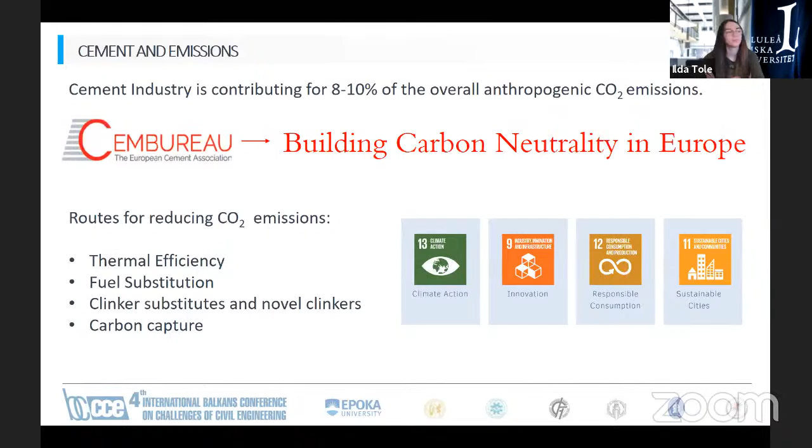In this study, we are utilizing two different materials, or two different sources: mainly clay as a low-grade supplementary cementitious material, and air-cooled blast furnace slag.

If we look at the overall presence of these supplementary cementitious materials, we can see that there are different sources, and some of them have a main challenge to be available as resources. For example, the main challenge is the location of these blast furnace slags, or the decarbonization of the power structure, which is reducing the amounts of fly ash materials.

On the other hand, there are a lot of sources that are commonly occurring and can be found everywhere, and are not yet utilized, such as clay in this case. We can see the high amount of unused residues here, around 600 million tons per year, for example, and the great amount of primary source supplementary cementitious materials which can be utilized.

Starting with clays, I start from the actual area where I'm living and studying. In Sweden, the presence of clay is not really so much, and it's mainly based in this south area. The main problem in this case is the instability of this material.

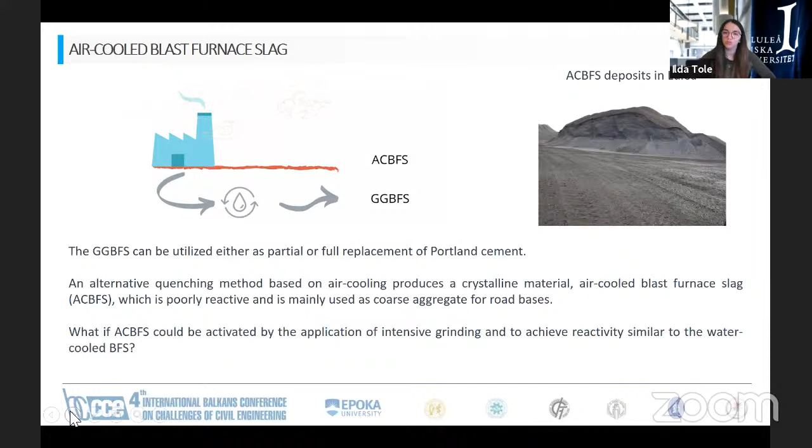Clay itself, but also air-cooled blast furnace slag, are usually thermally treated. Clay, for instance, is well known that calcination or thermal treatment can produce a material good for replacement of cement. But the thermal treatment is putting a lot more CO2 emissions because the temperatures utilized are quite high. So the proposal was to utilize another clean technology that doesn't use high temperature and doesn't use additional chemicals, and in this case it's mechanochemistry.

From the word itself, mechanochemistry is the chemical reaction induced by mechanical energy, and it can be connected to antiquity, to the frictional forces between stones, then the chemical reaction with the oxygen in the air, and the procuring of fire. In history, there is proof on documents of mechanochemistry back to 371 before Christ, when grinding in a mortar with a pestle, cinnabar can be produced into quicksilver. The first documented proof of mechanochemistry as a branch of chemistry was in 1891 by Ostwald.

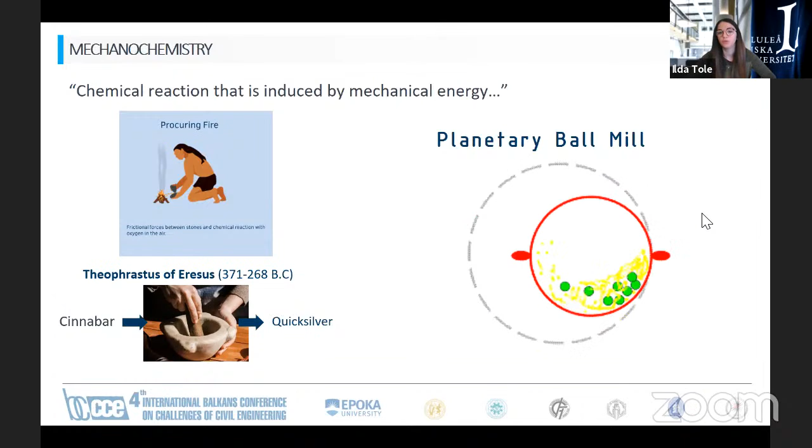However, nowadays, in recent years, this kind of technology is largely used for producing different materials. In our case, the mechanochemical activation is done in a planetary ball mill, and as from its name, it has a kind of planetary movement: the jar with the ball and the material being processed rotates around its own axis and around the main axis of the equipment.

Going to the laboratory view of this machine, of this equipment, this is the one that we are utilizing.

Different parameters can be changed to achieve different types of activation. Another study was done on the optimization of these parameters, and in this study case that I'm presenting, I'm just utilizing the optimized process parameters that I found previously: a fixed rotation speed at 500 rotations per minute, ball to powder ratio of 25, and grinding duration of just 20 minutes.

Both clay and air-cooled blast furnace slag were treated with this process. Not only was the particle size distribution evaluated, but also the main indices to evaluate if we were having some amorphization of the crystalline structure, which for us is the main indicator of reactivity of the material, by doing X-ray diffraction analysis.

As you can see, for the clay, all the peaks with the phases that were found in the untreated material completely disappeared after treatment. That is a sign of amorphization of the structure. The same thing was happening for the air-cooled blast furnace slag, so we are having really amorphized material after treatment in the grinding machine.

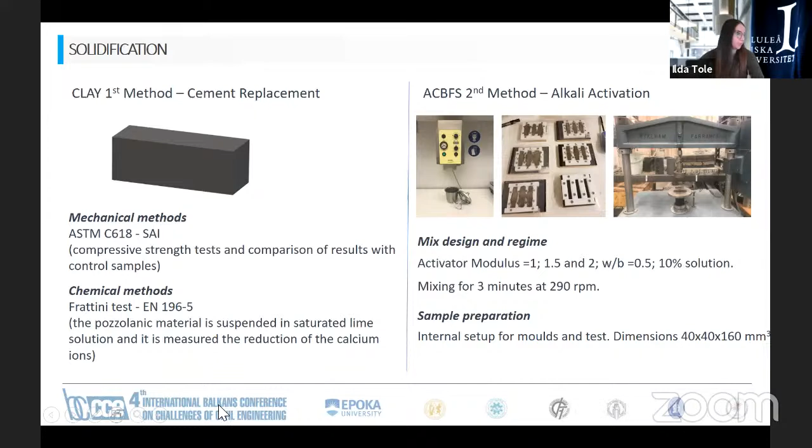For the cement replacement method, comparing the strength activity index, we had absolutely good results with the treated clay going over 127%, where the minimum required was 75. However, this was not enough. For that, we chose to do the Frattini test, or chemical analysis, because we already knew that after grinding, the material was fine, so a filler effect could contribute to the increase in strength values.

Another comparison was done with the alkali activated material, and we had a nice comparable result of compressive strength with the more commonly utilized ground granulated blast furnace slag.

So here you can see from the picture how these alkali activated materials look. This is the alkali activated material with untreated air-cooled blast furnace slag. It was not even possible to remove this material from the molds. While after mechanical activation, we had some samples comparable with ground granulated blast furnace slag.

The direct chemical analysis of the reactivity of clay was done with the Frattini test. In the Frattini test, all results lying above the solubility curve mean there is no pozzolanic activity, while all results below mean there is pozzolanic activity, and the treated clay was lying just below here.

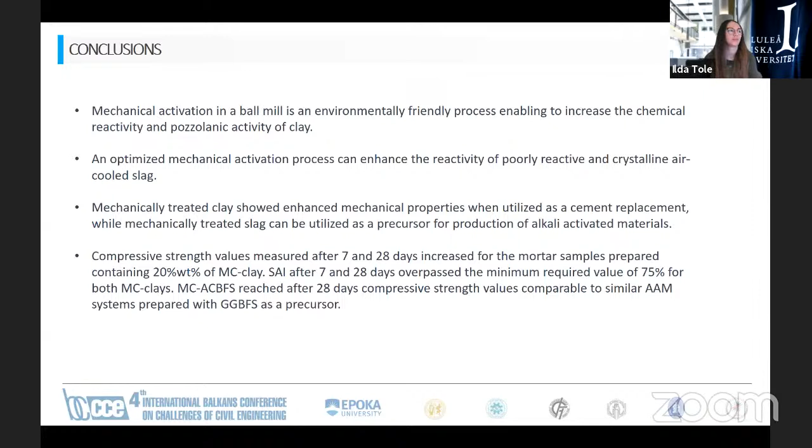Normally it is necessary to optimize the process parameters, especially for the air-cooled blast furnace slag.

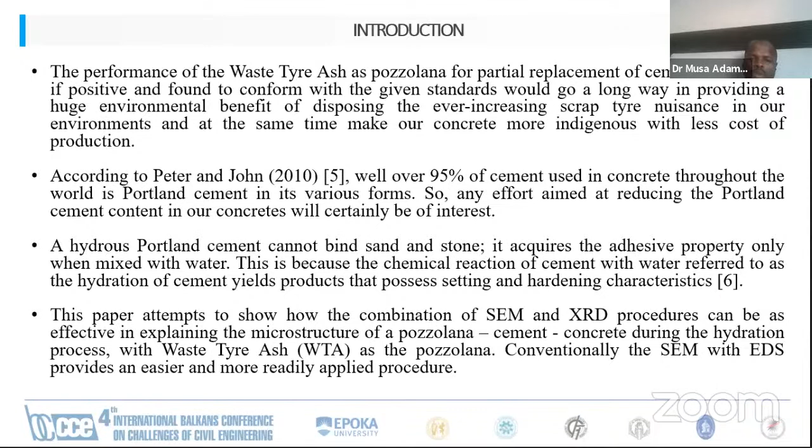This paper attempts to show how the combination of SEM and XRD procedures can be used effectively in explaining the microstructure of pozzolan cement concrete during the hydration process, using WTA as the pozzolan. Conventionally, SEM with EDS provides an easier, more readily applied procedure.

The materials used here are ordinary Portland cement obtained from Nigeria with a specific gravity of 3.15, sharp sand from Kano, Nigeria with a specific gravity of 2.8 classified as zone 1, and crushed granite of 20mm maximum nominal size with specific gravity 2.85, bulk density of 1,500 and impact value of 20%.

Then we used waste tire ash as a supplementary cementitious material, and it was obtained by burning the waste tire at a controlled temperature of 500 degrees, then allowed to cool and sieved through a 75 micron sieve.

The slightly high water cement ratio of 0.65 was intentionally adopted because it is known that most mineral pozzolanic materials are high water absorbers.

The absolute volume method formula is used, where W is water, C is cement, and the cementitious material. Using this formula, 7 mixes shown in Table 1 for the batch quantities of concrete materials and WTA were obtained. This is our table.

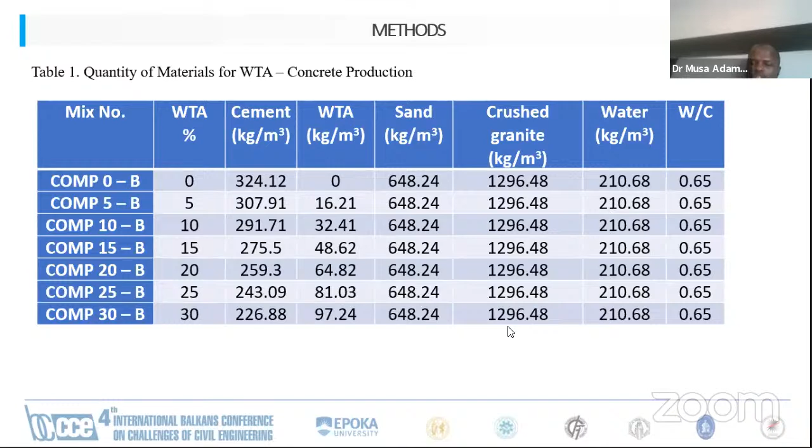We have our waste tire ash, the cement, then the sand, the crushed granite, water, and the water-cementitious material ratio.

The WTA was obtained by burning sliced pieces of waste tire to ash through heating at a temperature of about 500 degrees Celsius, in open burning for about 5 hours at a local burning site. The ash was allowed to cool and sieved to 75 microns.

A chemical analysis of the waste tire ash was conducted using XRF. The SEM works by aiming an electron beam at the surface of the specimen. When the electron beam strikes a solid object, the electrons are scattered or absorbed. The collection of these responses is what forms the SEM image.

Crushed samples of the WTA concrete cubes used for the compressive strength test were labeled and preserved for microstructure analysis of the concrete, to study the effect of WTA.

The X-ray diffractometer is used to scan for the XRD analysis. A small amount of powder sample is put into the aluminum sample holder and the surface is finished smoothly. The sample is scanned by an X-ray diffractometer using CuK radiation at 40 kilovolt, 20 milliampere.

The analysis is stepped at 0.04 degree increments and continues for a period of 3 seconds. In X-ray diffraction, X-rays are scattered by atoms in a pattern that indicates lattice spacing of elements present in the material analyzed.

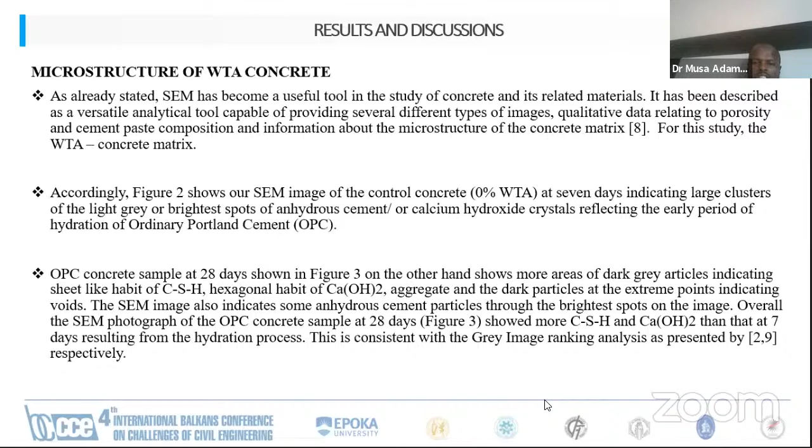Overall, the SEM photograph of the OPC concrete at 28 days shows more CSH and calcium hydroxide than at 7 days, resulting from the hydration process. These are the calcium hydroxide crystals, these are some of the pores, the residual cement, the voids, and the cracks. These are the calcium silicate hydrates and the calcium hydroxide.

So, the OPC at 28 days, shown in Figure 3, shows more areas of dark gray particles indicating sheet-like habit of CSH. The SEM image also indicates some anhydrous cement particles through the bright spots in the image. Overall, the SEM photograph of OPC concrete at 28 days shows more CSH and calcium hydroxide than at 7 days.

For concrete with 5% WTA, the morphology at 28 days curing shown in Figure 4 indicates observed WTA cement hydrated paste with large voids, as evidenced by dark patches of black areas indicating voids, and visible cracks consistent with this explanation.

The voids here appear larger than the OPC concrete. Residual cement grain appears brightest, but with less hydration product of calcium hydroxide and CSH due to dilution of OPC, with low pozzolanic action of WTA at 28 days.

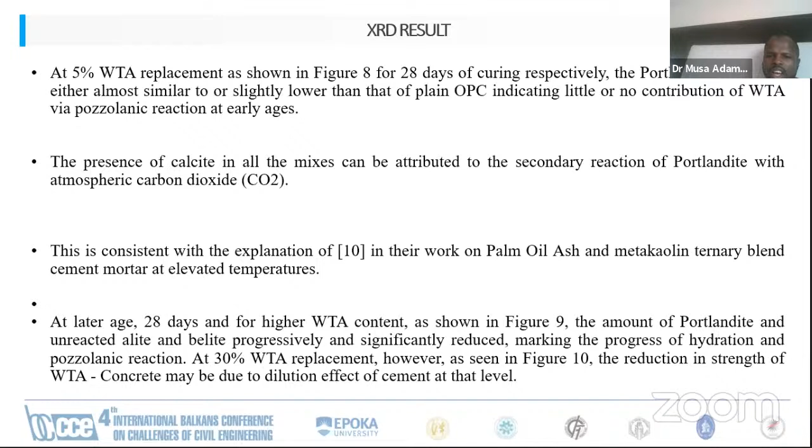At later ages, 28 days, for higher WTA content, as shown in figure 9, the amount of portlandite and unreacted material progressively and significantly reduced, marking the progress of hydration and pozzolanic reaction. At 30% WTA, however, as seen in figure 10, the reduction in strength of WTA concrete may be due to dilution of cement at that level.

In conclusion, both SEM analysis and XRD results of WTA concrete indicate the occurrence of pozzolanic reaction between waste tire ash and cement, and that the waste tire ash concrete has a more porous microstructure than the OPC concrete, especially at higher WTA content. It also showed that the pores in the WTA concrete increase with increase in waste tire ash in the mixtures. Thank you. These are the references used.

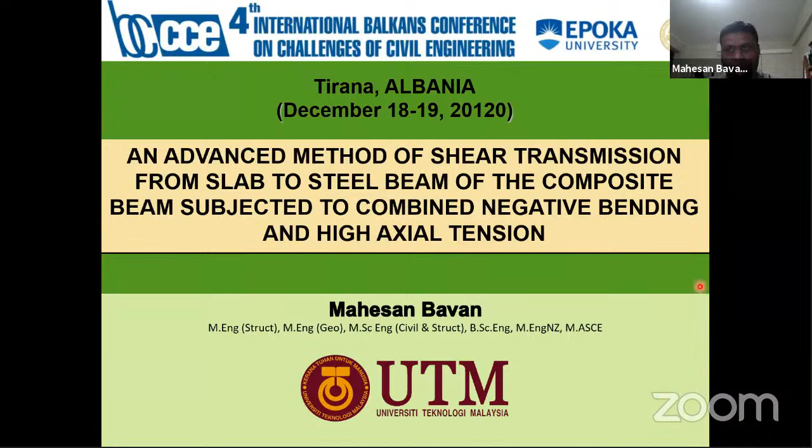So my presentation will be included in 4 parts. First, introduction, research methodology, and results and discussion. Finally, summary and conclusion. In the introduction part, we will see the general background of the research.

In the research methodology, we will see some of the experimental reviews and finite element model development with full and partial shear connection. And in the results and discussion part, we will see the finite element model validation and development of the finite element model with wave strips and shear connectors.

This is the new part of the research: the effects of waveform steel strip with shear connectors in the negative bending region of the composite beam. Then finally, summary and conclusions.

So basically, the introduction and gap of the research is in steel concrete composite beam with waveform steel strip. This is the new part. The mechanical shear stud connectors of the steel concrete beam are small devices that transmit high shear forces from the concrete slab to the steel beam, and are key components in limiting the ultimate limit state of the composite beam.

This is usually the steel concrete composite beam component that everyone knows. Then there's a small device called the shear stud connector. This device is the key element to transmit the high shear force from the concrete slab to the steel beam.

The function of the shear stud connectors between the concrete slab and steel beam is complex, and the ultimate limit state is influenced by the shear flow forces transmitted between the steel beam and concrete slab. The shear connectors will function at partial connection, even though the design of components is developed for full shear connection.

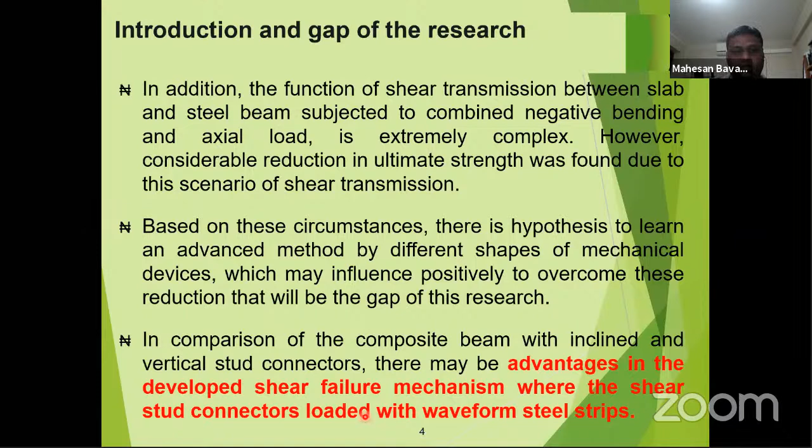In comparison of this composite beam with inclined and vertical stud connectors, there may be advantages in the developed shear failure mechanism, where the shear stud connectors are loaded with waveform steel strips.

So the usual composite beam is like that: the steel beam, then the shear connectors, then the reinforcing bar and steel strip. So this one is what exists in the codes, only subjected to vertical loads only.

So now we are investigating vertical and axial loads. So we introduce one steel strip, like the waveform steel strip with shear connectors, to resist more shear transmission because of the axial loads.

So this is some of the background of the research for the combined axial loads. I have also done earlier work with some other devices.

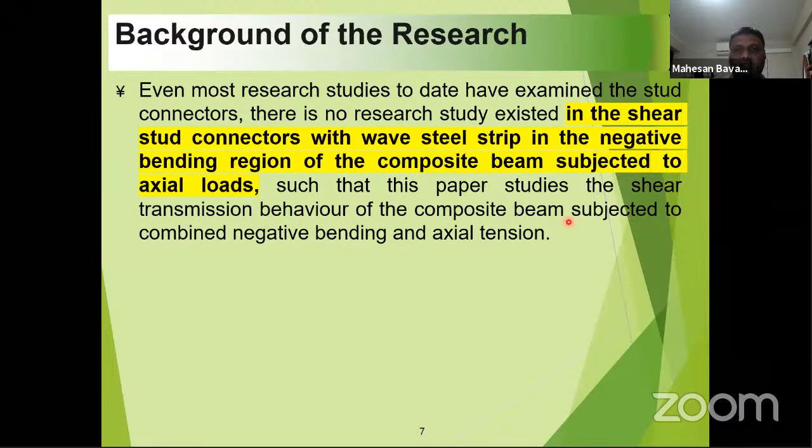So the gap from past researchers is in the shear stud connectors with wave steel strip in the negative bending region of the composite beam subjected to axial loads, such that this paper studies the shear transmission behavior of the composite beam subjected to combined negative bending and axial tension.

So some of the experimental reviews I took from existing literature: full connection and partial connection steel concrete composite beam experiments labeled as CBF1 and CBP1. This experiment supported vertical load only.

So the ultimate case predicted by 220 kilonewton meter, and with one partial connection, is 180 kilonewton meter. So I developed the finite element model using Abaqus 3D finite element model.

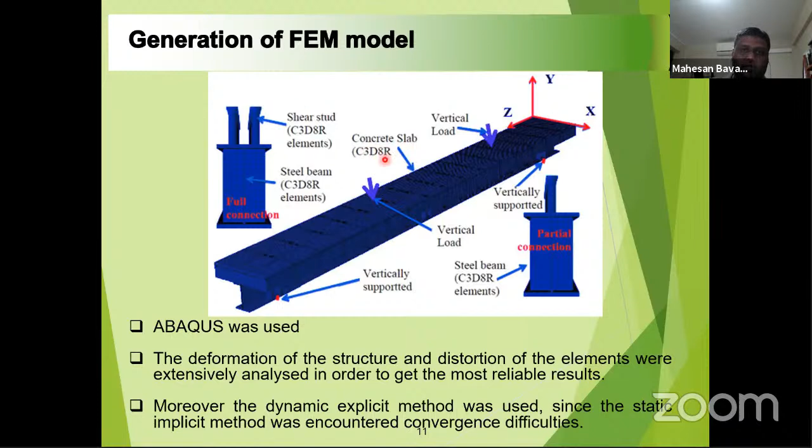This includes the steel beam, shear connectors, and the concrete slab. All use C3D8R three-dimensional elements. The steel bar only uses truss elements, and the interaction is surface-to-surface contact interaction behavior that I developed. The rebars are all used as embedded constraints.

For the concrete material of the concrete slab, I developed it based on the proposed Desayi and Krishnan existing literature equations. The compression behavior and the tension behavior used the Eurocode proposal.

For the steel components, rebars were developed using the bilinear property, then the shear stud is only 350 Newton per millimeter square developed. Then the steel beam developed nonlinear behavior, also developed exactly for the steel beam.

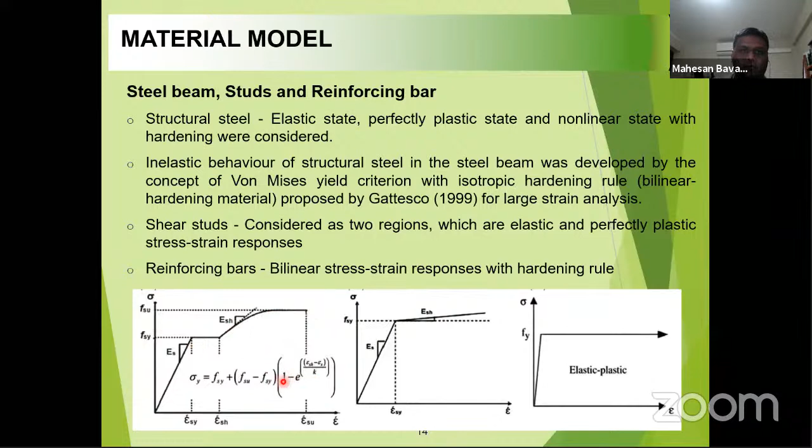Based on the prediction for the full shear connection and partial shear connection, they're almost very close to each other, only 1-2% deviation with the experimental analysis. So we conclude this model can be used for parametric studies.

So then knowing the gap of the research, to address this gap, we introduced this waveform steel strip to the composite beam. So we introduced this waveform steel concrete composite beam with wave strip in addition.

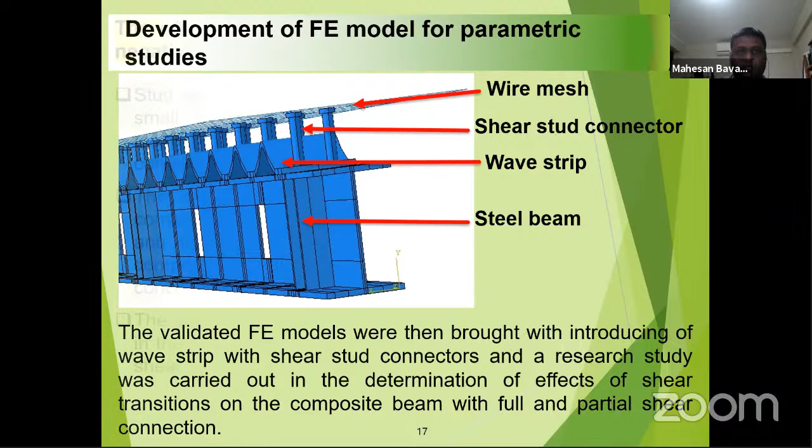The validated finite element models were then used with the introduction of wave strip with shear stud connection, and a research study was carried out to determine the effects of shear transmission of the composite beam with full and partial shear connection, and the effects of wave strip with shear stud connectors in the negative bending region. Stud shear connectors, which include a head and shank, are small mechanical devices, where the purpose of the head is to avoid separation between the major material components of the concrete slab and steel beam.

The slip, which occurs because of the deflection of the composite beam, induces a gap between the concrete slab and the shank of the shear stud, so that failure of the composite beam occurs due to the slip between the concrete slab and steel beam.

Under vertical load, there will be a gap between the shear connectors and the concrete slab due to the slip. The axial tension also will induce excessive slip, so the gap will be larger. So we are introducing the wave strip to control and resist this, helping the composite beam reach a higher ultimate state.

Studies from existing literature show that cracks induced in the negative bending region of the composite beam with full shear connection will not function properly in the composite beam.

So in the developed model, labeled as full and partial, we focus on all the failure behaviors: separation of shear stud, slip of shear stud, deformation of shear stud, concrete crushing and cracking, and buckling of steel beam. We check all these behaviors to determine which one is the governing failure criteria in the composite beam at this stage.

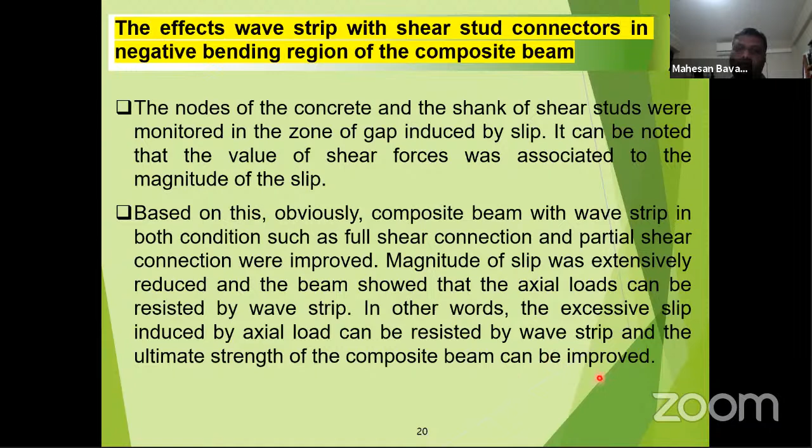The cracking in the negative bending region was postponed with the application of wave strips. It can be noted that the first failure modes are concrete cracking and shear stud deformation in the composite beam subject to combined negative bending and axial loads, and this criteria can be postponed by the application of wave strip. This is what we found based on the research.

Based on this, we draw the summary and conclusion. The nonlinear finite element model study was presented to simulate the shear transition behavior in the negative bending region of the composite beam with wave strip. Wave strip with stud shear connectors, with nonlinear material models of steel and concrete composite components, were incorporated into the finite element model, which was carefully calibrated against test data of full and partial shear connection.

In comparison with the installation of wave strip with shear connectors, the FE model results indicate that the load carrying capacity was developed, postponing the failure criteria occurring in the components of the composite beam. These are our summary and conclusions today, and some of the references I used. Thank you everyone for watching my presentation.

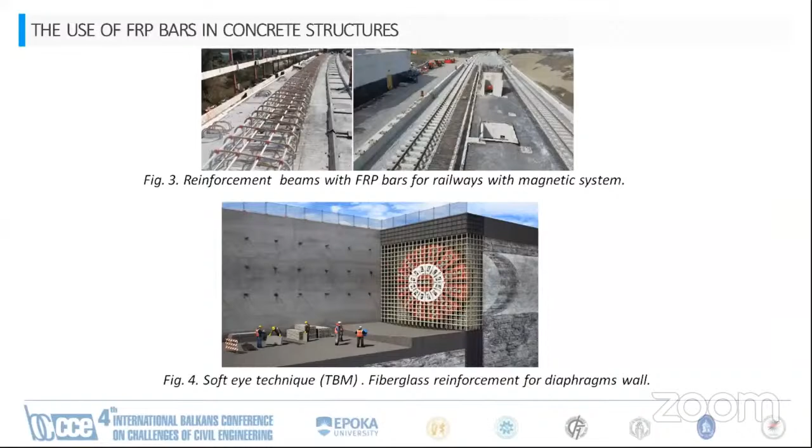A little brief history about the first studies and first use of FRP. In 1960 starts the use of FRP bars in test form. In 1997 the first document for the use of FRP bars, and also in 2001 American Concrete Institute ACI. Also, at least recently in 2012, Eurocode.

We should mention that this experimental study is done according to ACI codes. Comparison of FRP bars and conventional steel bars is the main point of this study. By stress-strain curve we can see the behavior between conventional steel bars and FRP bars.

On FRP bars is noticed a high tensile strength, about 80% more than steel bars, but FRP bars have a brittle failure and not a classical stress-strain curve like steel bars. This is the reason why for FRP bars the serviceability limit state is limited at 33% of the maximum strength of the beam.

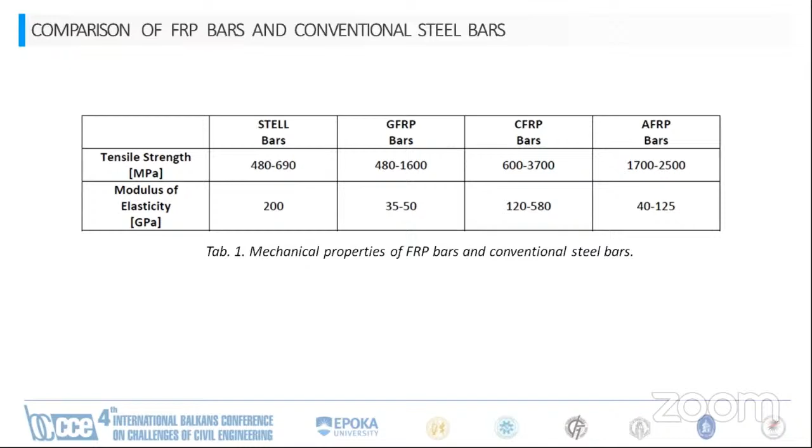FRP bars are composed of two components, fibers and resin. The naming of FRP bars is according to the type of fiber. The main compositions of FRP bars are GFRP, CFRP, BFRP, and AFRP, which mean the most common types are glass fibers, carbon fibers, basalt fibers, and aramid fibers.

From the table we can see that carbon fibers have the highest tensile strength and modulus of elasticity. The most common types of resins are epoxy resins, polyester resins, and vinyl ester resins.

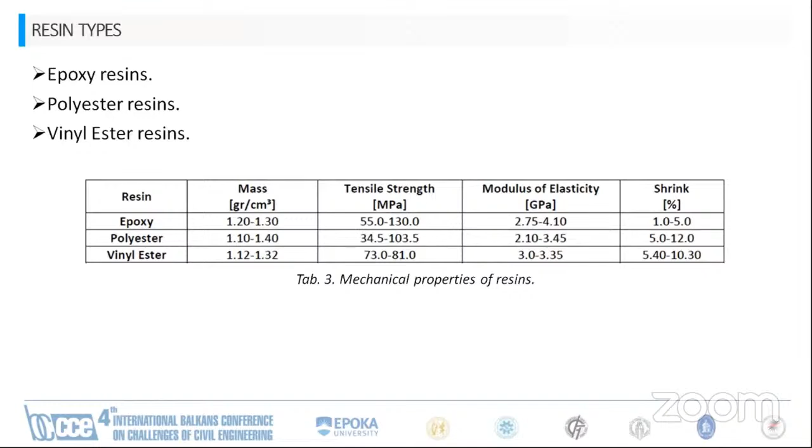The manufacturing process is called pultrusion. This process goes through several stages like fiber creel, guide plate, resin bath, preformer, forming and curing die, pulling system, and cut-off saw.

The procedure of testing consists first of testing the mechanical properties of GFRP and CFRP, then testing mechanical properties of concrete, and finally testing reinforced beams with GFRP and CFRP overall.

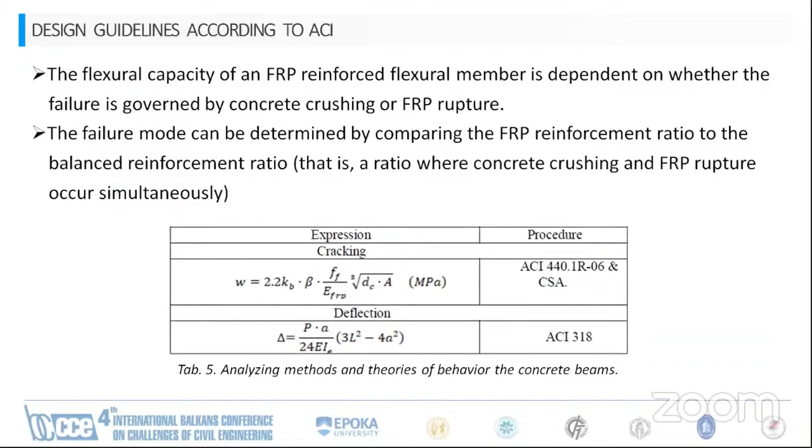The flexural capacity of an FRP reinforced flexural member is dependent on whether the failure is governed by concrete crushing or FRP rupture. The failure mode can be determined by comparing the FRP reinforcement ratio to the balanced reinforcement ratio, that is, a ratio where concrete crushing and FRP rupture occur simultaneously.

The balanced reinforcement ratio and the nominal flexural strength defined in the presented sections can be obtained by using a sectional analysis in different stages of SLS theory, including the percentage of this ratio.

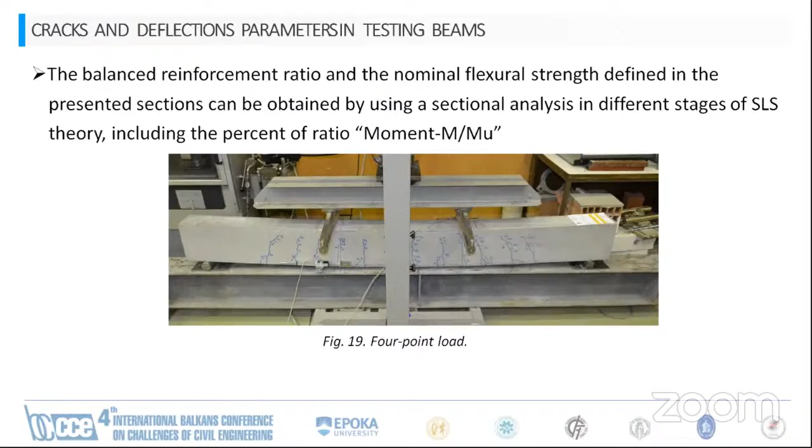Finally, conclusions. At RC beams with GFRP bars it is noticed that with increasing bar diameter, bearing capacity increases and SLS decreases. Vice versa, at RC beams with CFRP bars it is noticed that with increasing bar diameter, both bearing capacity and the value of SLS increase.

The use of GFRP bars in construction nowadays is difficult to achieve as a replacement of steel bars due to the low modulus of elasticity and characterization by great deformations.

The use of CFRP bars as a direct replacement of steel bars is difficult to achieve because of the poor bonding with concrete. With the improvement of adhesive properties of carbon bars from different manufacturers, the use of these bars can be increased because they have a relatively elastic modulus similar to steel.

The use of these bars at this stage is limited due to some properties that may be improved in the future by different manufacturers.

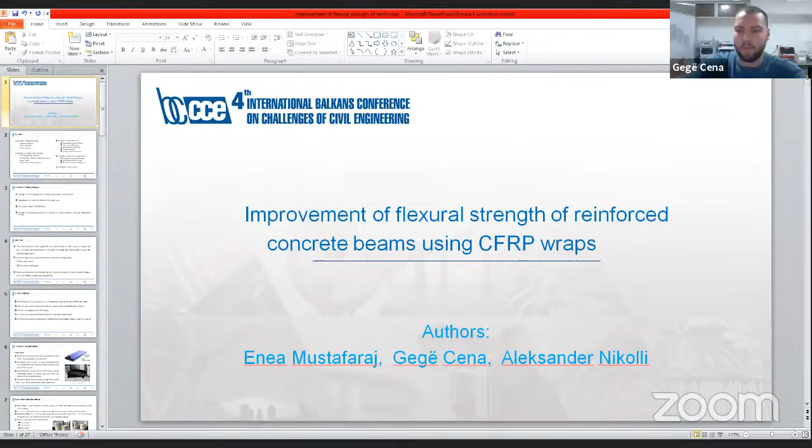I'm continuing. Today I'm going to present the improvement of flexural strength of reinforced concrete beams using CFRP wraps. This experiment was done by Professor Enea Mustafaraj, me, Gegë Cena, and my colleague Aleksander Nikolli.

The outline that I'm going to present has 5 chapters. I'm going to go from chapter 1 to chapter 5, the conclusion.

The problem statement is the damage of reinforced concrete buildings due to natural and man-made hazards: the degradation of concrete elements over time, the corrosion risk of steel elements, and the change of occupancy, such as an increase in the number of stories without a proper engineering study.

The objective. The main objective of this experiment is to see the effect of CFRP wraps, evaluate the class of concrete, and understand if it is worthy structurally and economically to repair and reuse damaged beams.

Another objective is to evaluate concrete compressive strength using non-destructive and destructive techniques. These processes were done by conducting tests such as bending RC beams, Schmidt Hammer test, core drilling, and compressive strength test.

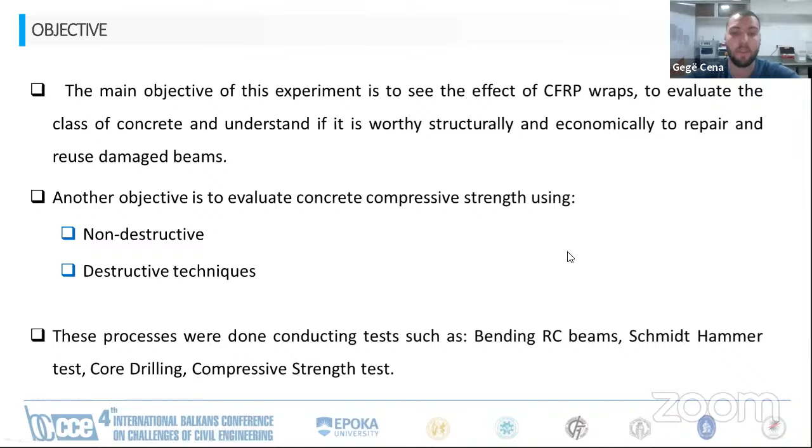The scope of works: 3 beams of 0.21 by 0.27 by 2.5 meter dimensions, of concrete class C25/30, were built. The beam analysis and detailing were done in Tower and ArmCAD from Radimpex software.

We made the test setup, the application of CFRP wraps, and the comparison of expected results and experimental results. We also did the difference between non-destructive and destructive techniques of quality control of concrete.

Carbon fibers. The first time carbon fibers were used outside of research studies was at the Ibach Bridge in Lucerne in 1991. This material is used a lot since it is very strong and also very lightweight. Carbon fibers are multiple times stronger than steel and twice as stiff.

The experimental results show that the use of CFRP wraps as external strengthening increases the ultimate load, crack pattern, and deflection of the strengthened beams. It also increases the flexure, shear, and compressive strength of concrete beams, slabs, columns, wooden beams, masonry elements, etc.

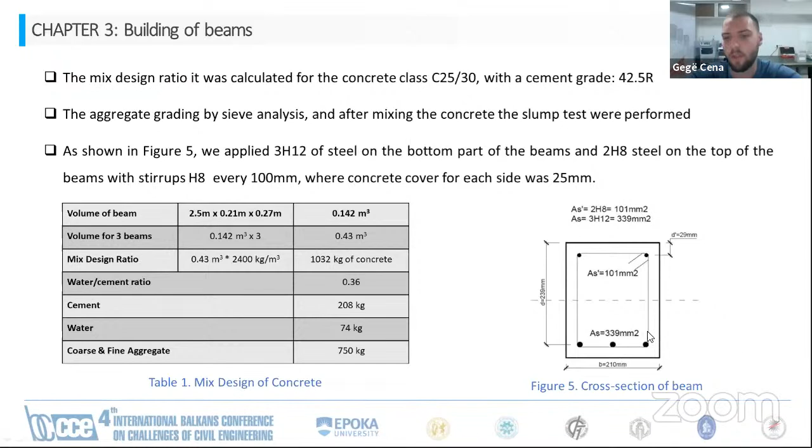Application of carbon fiber reinforced polymer wraps. Before ordering the carbon fibers, we first made a sketch of how to place it and how much we needed. Epoxy primer was the first material applied to the beam for strengthening it with CFRP wraps. It was applied by roller to the prepared substrate at a coverage of 4 to 6 square meters per kilogram, then allowed to become tack-free before application of the epoxy-based resin adhesive.

Application of CFRP wraps: the epoxy-based resin was applied in 2 phases, first before applying the CFRP wraps, and second after. We used a smooth roller to apply it with a thickness of 0.8 to 1 millimeter, then laid down the CFRP wraps while the adhesive was still moist on the surface. After installation was completed, we waited 3 days to test them because they had to strengthen.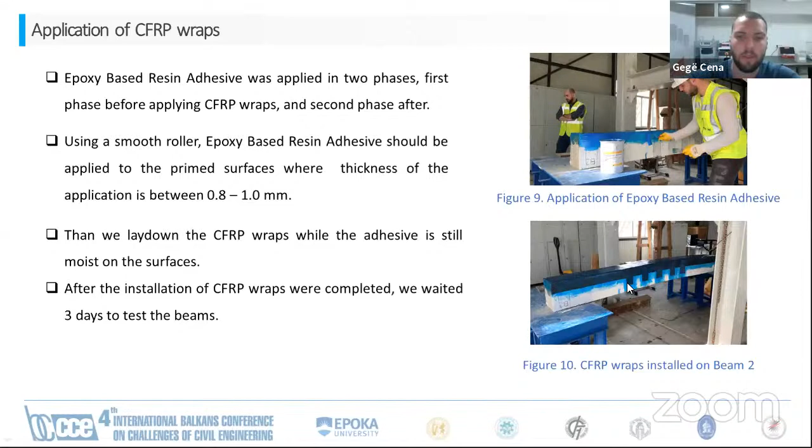Testing of beams. Three series of bend experiments were conducted using beam samples of the same size. The first test was done on a simple reinforced concrete beam.

The second beam was initially cracked and then repaired by applying epoxy resin strengthened with CFRP wraps and was tested again. The third beam was a non-damaged reinforced concrete beam, but just strengthened with carbon fiber reinforced polymer wraps.

So this is beam 2 after CFRP wraps were applied, and another bending test was applied again to see the effect of the CFRP wraps.

This is the first bending, and this is the second bending of the same beam. The third test was applied on a non-damaged reinforced concrete beam, strengthened with CFRP wraps.

It was also planned that this beam would reach the highest carrying capacity compared with the two other reinforced concrete beams. So these are the pictures from applying beam 3.

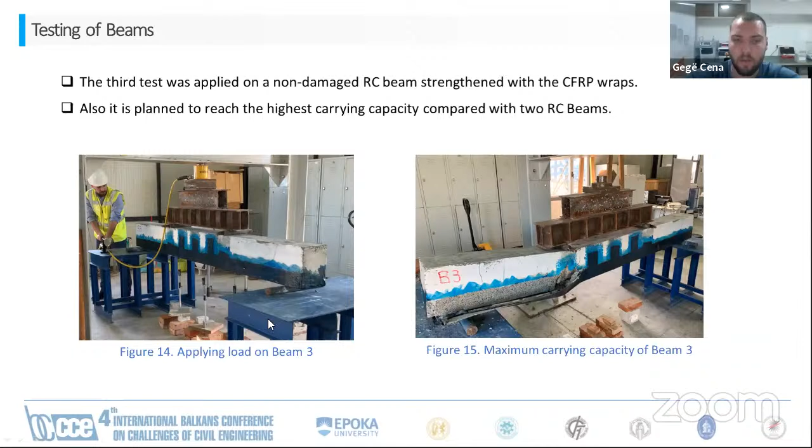Quality control of concrete. We also made the quality control of concrete using two techniques: the first was a non-destructive technique using the Schmidt Hammer, and the second was a destructive technique with core drilling.

The core drilling technique is carried out by means of a carriage consisting of a cylindrical cutting of the concrete elements that have been previously determined to be analyzed. In this case, three columns and three beams were chosen, from which 75 millimeter diameter cylindrical concrete samples were taken.

We also made the compressive strength tests of those samples, and now here are the results of the bending of the reinforced concrete beams.

Beam 2 reached an ultimate load force of 176 kilonewtons, which is 38% greater than the first result of the same beam when it was not strengthened with CFRP wraps.

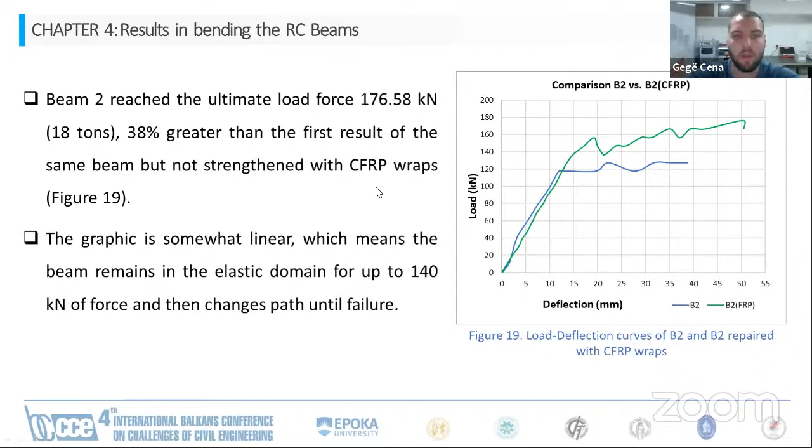Beam 3 was not pre-cracked, but just strengthened with CFRP wraps using the same procedure as beam 2, and then was tested. The ultimate load test force was 215 kilonewtons, which is 22% greater than the ultimate load capacity of beam 2 that was repaired with CFRP wraps.

215.8 kilonewtons, that is 57% greater than the ultimate load capacity of beam 1.

These results show that beam 3 is 1.57 times stronger than beam 1.

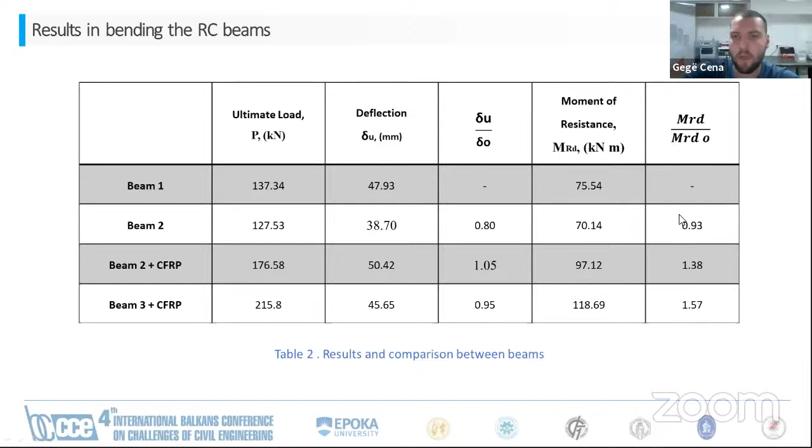We also got the results from the bending of these reinforcements, the experimental bending. And we got the results of non-destructive techniques that show the quality of concrete was from 30 to 36 megapascals.

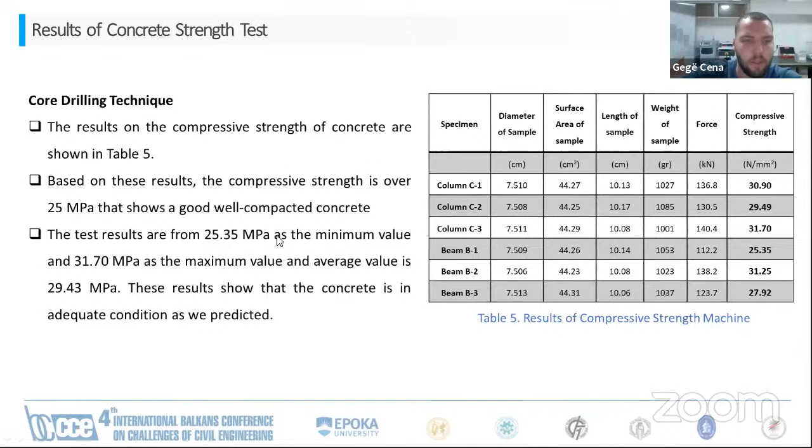These are the results of the core drilling techniques. Because it is a cylindrical sample, we got 25 megapascals, which corresponds to the C25/30 grade.

And after all the experiments, we reached our conclusions. Based on the specific findings of this research, the following conclusions may be drawn.

It is recommended to use CFRP wraps as a reinforcement material for damaged structures. CFRP wraps can be used as reinforcement to improve the flexural behavior of beams, and they have increased the stiffness and maximum load of the beams.

The crack width and deflection decreased for the strengthened beams, and the ultimate load test of the strengthened beams was 1.57 times greater than the control beam, beam 1.

Also, there is a slight difference between the Schmidt Hammer compressive strength and the compressive strength of the core drilled concrete samples. The Schmidt Hammer results are used only for general and fast evaluation; for more specific and accurate results, destructive tests must be performed.

Thank you very much. I hope you could understand me.

First of all, thank you for having me and organizing this wonderful event. My topic is on the structural assessment of the southwest wing timber roofs of the Loreta in Prague. This is the outline of my presentation.

The Loreta in Prague is a pilgrimage complex of buildings, which consists of small buildings as can be seen on the picture on the left, and the site is located in the Prague 1 district in the wonderful city of Prague.

The main complex consists of the Santa Casa in the middle. Just one.

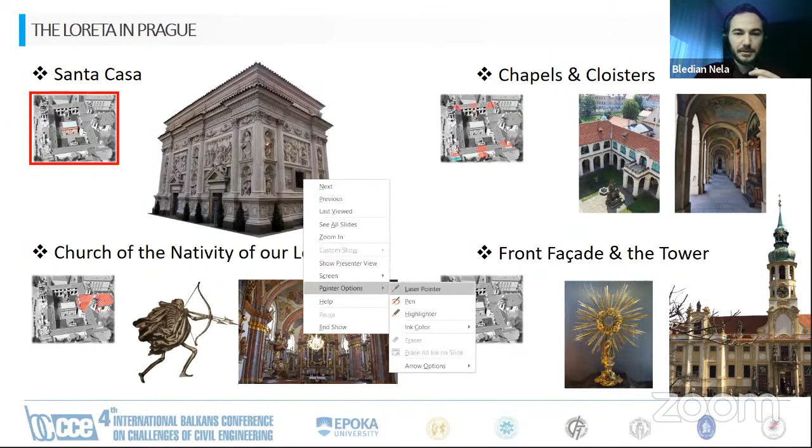So here in the middle, which is a copy of the original Santa Casa in Italy. Then we have the chapels and the cloisters at the edges and in the middle of these cloisters. And the Church of the Nativity of Our Lord, which is concentrated here on the far back of the complex.

One interesting thing is the murals in the crypt under this church, which are amazing and are open to the public some twice a year or once a year.

On the front is the main facade, which is a wonderful work of the famous architects Dientzenhofers. And on the main facade is this wonderful tower, which consists of bells original from the beginning of the tower, and they are still played originally as they were played in the past. On this front part of the building, there is hidden also this treasure, which is the most valuable treasure of Prague, called the Prague Sun, consisting of around 6,000 diamonds.

This is a historical development of the construction of the complex of the Loreta in Prague. In 1626, the first stone was laid, and then the cloisters were constructed around 1634. The tower construction was finished in 1646.

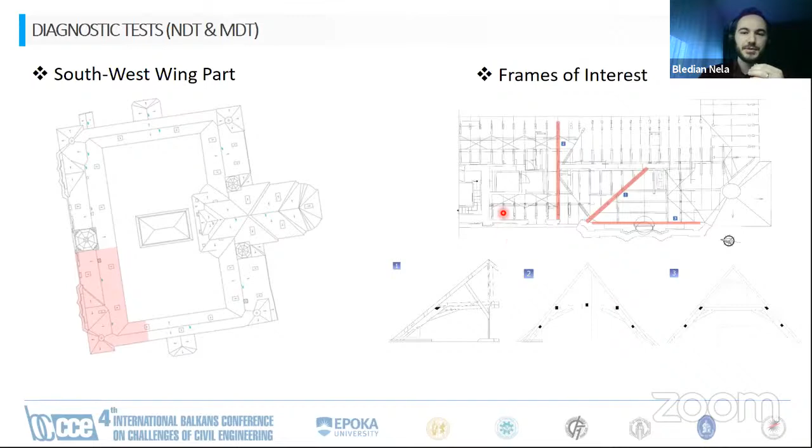We saw that some of the main connections are carpentry connections made of wood, and some elements were removed, so we can assume that there were some changes, elevations, or strengthenings made. We saw some past interventions, such as columns added here to strengthen these rafters.

They introduced some holes to put something against insects. They introduced some metallic connections, also some fireproof measures, and so on.

But then we found out that there are also some large deflections seen on the frames. So we did the visual inspection according to this standard, and based on the knots, the slope of grains, the growth rate, the fissures, the geometric features, and using a resistograph, we were able to trace these circular rings of the trees.

Using all of these parameters, we were able to find some qualitative data to get mechanical parameters for the timber, which are shown here.

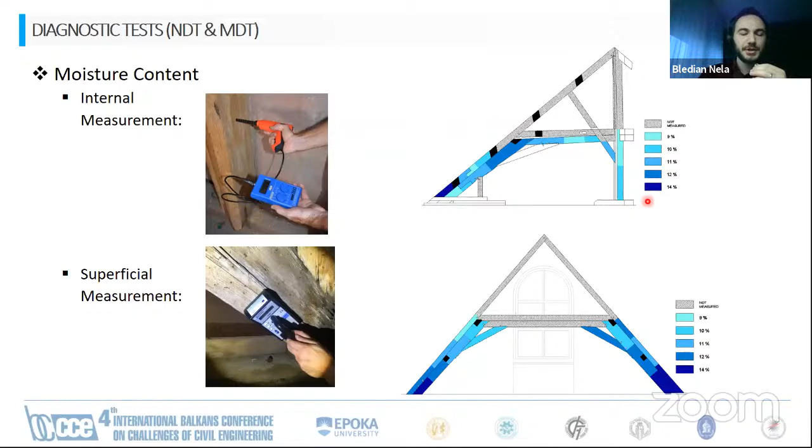We also did some moisture content testing inside the beam. We made some holes and checked the internal measurement, as well as superficial measurements. We were able to see that the maximum moisture content is lower than 14%, which is not so severe for these types of structures, since they do not present any moisture damage or reduction of compressive strength of such features.

Afterwards, we did some resistance micro-drilling through a resistograph, and we were able to find some holes on the rafters and on the columns, and we made some assumptions of why they were there.

Afterwards, these are the results of the resistance micro-drilling, and through some correlation equations made by Kloiber et al., we were able to find the compressive strength and the density of the timber elements.

Afterwards, we used this innovative tool from Professor Drdacky, which is the loading jack. The loading jack is introduced inside the wood, and at four sections it performs a compressive test in situ on the timber elements.

And you can find this graph, which shows the force and deflection relation. And also you can compute the modulus of deformability.

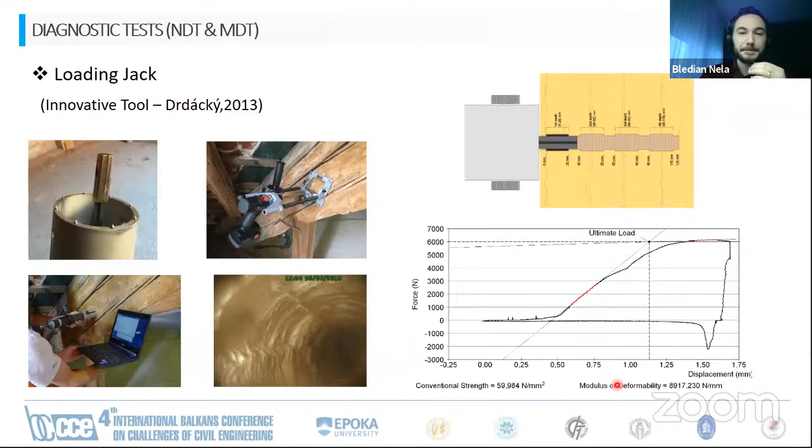Afterwards, again from Mr. Kloiber's experiments, we were able to correlate these results to compressive strength, to modulus of elasticity, and to the density. So using all of this data, visual resistance, microdrilling, and all those that I presented before, we were able to get a class which best suits these timber beams on the structure from the norms of Czech Republic. So we get a class of C20 for timber.

Afterwards, we did some load analysis on the timber. So these are the loading conditions. I will not get into details.

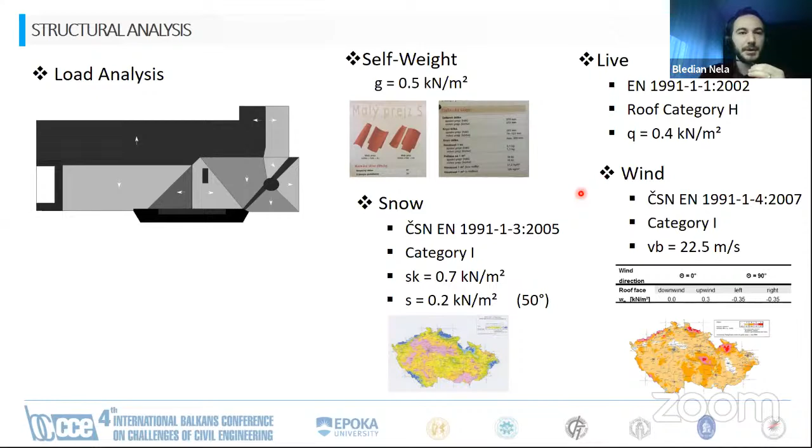And then for this part of the roof, we did a 3D model. We introduced the loads, and then to have it more simple, we changed to a 2D model so we could make some modifications. And we introduced 3 scenarios.

So the first scenario is before the intervention, because we saw that in the last floor there was a concrete floor added not so recently. And before the interventions, we introduced these supports here, which have some axial stiffness as a horizontal constraint to introduce the thrust of the horizontal beam, which may have been here.

And on scenario 2, we remove this beam, and this support is free to move in the horizontal direction, because this is introduced to represent the interventions at that stage. And scenario 3 is the current state, where they introduced this short column and this strengthening horizontal beam.

But to have these deflections transfer on this truncated rafter here, and to introduce the wall, which is on the right side, we had to do some contact modeling. But since we were in a commercial software, it was not so easy. So we had to make sure that we transfer the deflections and the friction.

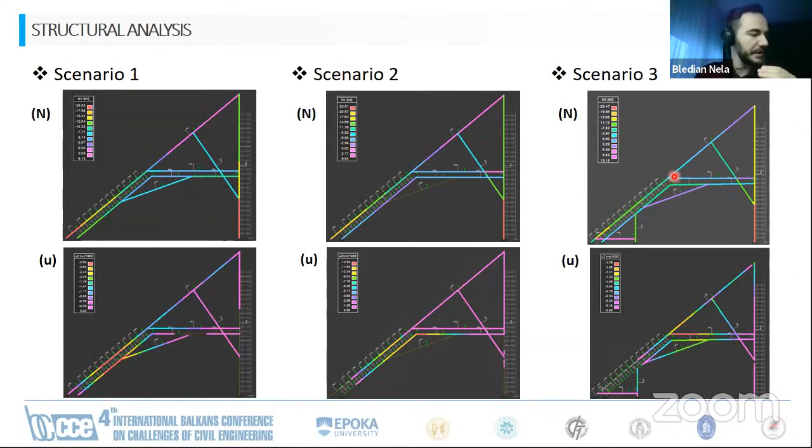So with this wonderful drawing, I would like to conclude that we were able to make these hypothetical assumptions from the historical background, but also from the diagnostic tests. And then through structural analysis, we made the final hypothetical assumption, which is highly likely to be true, but it's just a hypothetical assumption. But in any case, the structure is safe, and we conclude it that way. Thank you very much for your attention.

For that interesting presentation, if the audience has any questions. I would like to ask one question.

Yes, Professor? Yes. First of all, I congratulate Bledian for this very nice presentation, especially also I think it's related with the nature and the quality of the building that he presented. I'd like to know whether this was part of a certain thesis or kind of major research study, or a project based on something.

Okay, so mainly the main project of the building for the Loreta complex is based on a bigger project from the institute in Czech Republic. But my focus and my part of the study was only for a thesis, for a master's thesis in historical monuments. Okay, it was a very nice presentation. Thank you. Thank you very much.

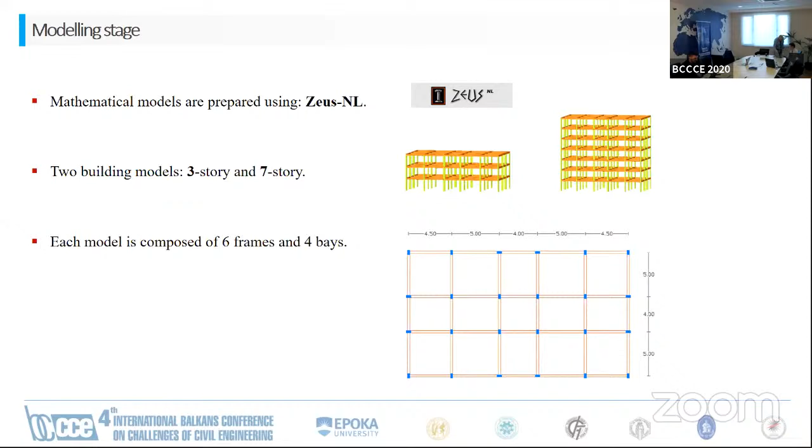The models have the same plan view, both symmetrical in X and Y direction, and also selected as frame reinforced concrete buildings without having any shear walls.

The Zeus software is used as a suitable platform, capable of conducting finite element analysis, developed especially for earthquake engineering purposes. It is capable of modeling steel structures, reinforced concrete structures, as well as composite structures under the application of static and dynamic loads. It can also consider geometrical nonlinearities, and the material can be composed of elastic or inelastic material.

As a new and well-known analysis, incremental dynamic analysis is used in order to evaluate the seismic performance of structures. It considers a suite of ground motion records, and the idea basically is to increment the peak ground acceleration in order to push the building until it fails and reaches the global instability or global failure limit state.

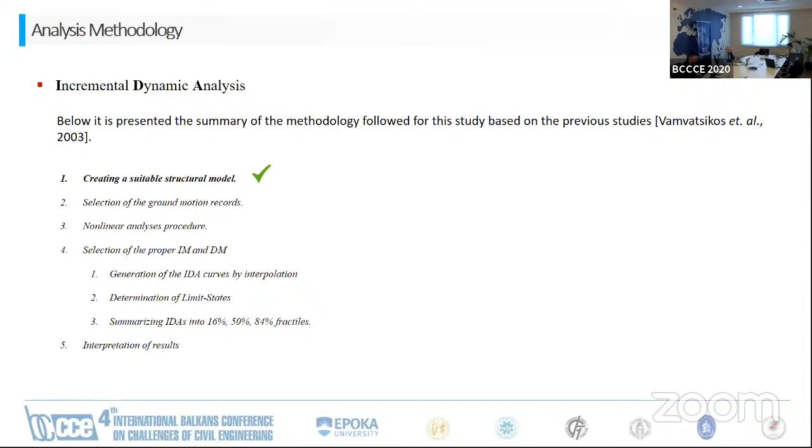So in the beginning, we are going to create a suitable structural model. For our case, we are using Zeus as a capable and powerful software, which runs the nonlinear dynamic analysis very fast compared to other software, and is also capable of running our incremental dynamic analysis. Secondly, it's important to select suitable ground motion records.

The nonlinear analysis procedure is basically what we have presented before, so it's the same as time history analysis. The only difference is that incremental dynamic analysis is going to plot the capacity curve of the structure under the increment of peak ground acceleration for the different analyses it can conduct.

So basically it starts to run the analysis, and in the beginning it will present the results as a single dot, and then, considering the increments specified by the user, it's going to replicate that analysis until the global instability or global failure of the structure is reached.

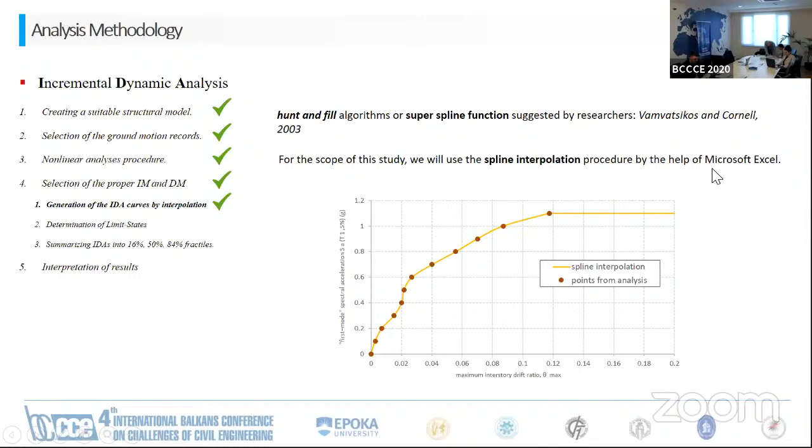The brown dots shown in this graph represent one analysis taken from incremental dynamic analysis, and later on we are going to use interpolation in order to show the curve of incremental dynamic analysis. Basically, this step requires two different algorithms. We can either choose the hunt and fill algorithm, presented before by researchers, or a superspline algorithm, which is more user-friendly and can also be utilized by means of Microsoft Excel. In our case, we have utilized this method, simply by using Microsoft Excel, to prepare all the incremental dynamic analysis.

According to performance-based earthquake engineering, at least three limit states are needed in order to consider the results at the end of all the generated incremental dynamic analysis. So we are starting with immediate occupancy, collapse prevention, and then global instability.

According to the FEMA guidelines, especially in this case FEMA 356, immediate occupancy is determined as 1% of damage measure, which corresponds to 0.01. Collapse prevention corresponds to 10%, or 20% of the elastic slope. And in the end, global instability, which is the global failure of the structure, will be represented by the flat line. The global instability is obvious from the graphs, and immediate occupancy is also easy to find, since this safe procedure corresponds to 1%. The collapse prevention should be considered as 10% or 20% of the elastic slope.

In order to find the 20% of the elastic slope, we need to develop a special algorithm to calculate those results. Considering that the curve might be very complex for the incremental dynamic analysis, it may happen that we have different collapse prevention points. Based on research and previous studies, the collapse prevention point should be considered the one happening at or before the 10% of damage measurement. For this case, we are using an algorithm taken from the Bezier curve, which has been used especially in computer graphics, and is very easy to interpolate the results and find the respective values, especially using a piece of script or computer programming.

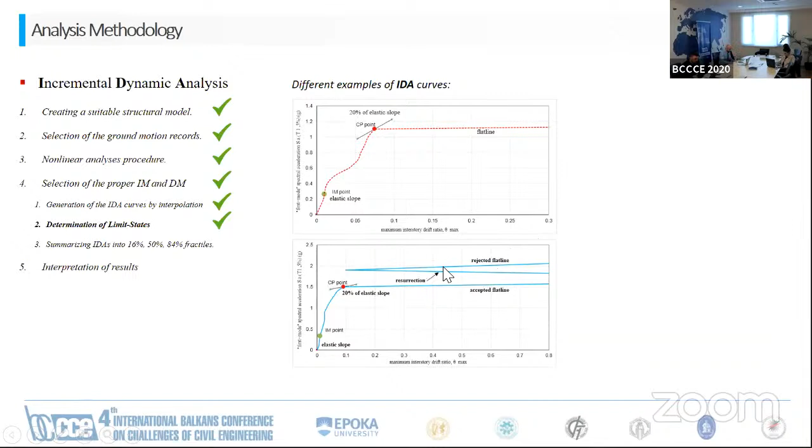IDA curves, especially for the last stage which belongs to global instability, are shown by the flat line or horizontal line in our graphs. There might be different cases. For example, in the second case, we can see at least two flat lines, which the software may give as these kinds of results, continuing with a second or more multiple flat lines. For these cases, we reject all the other flat lines after the first one occurred.

It is also proposed by researchers that in order to interpret the results, it gives much more information to use fractiles, summarized as 16%, 50%, and 84%. We have observed that for some cases, some of the records actually forced the low-rise building to fail before the mid-rise building, and this can happen due to many reasons, such as the inherent characteristics of the ground motion record, resonant effects, and possibly other reasons as well.

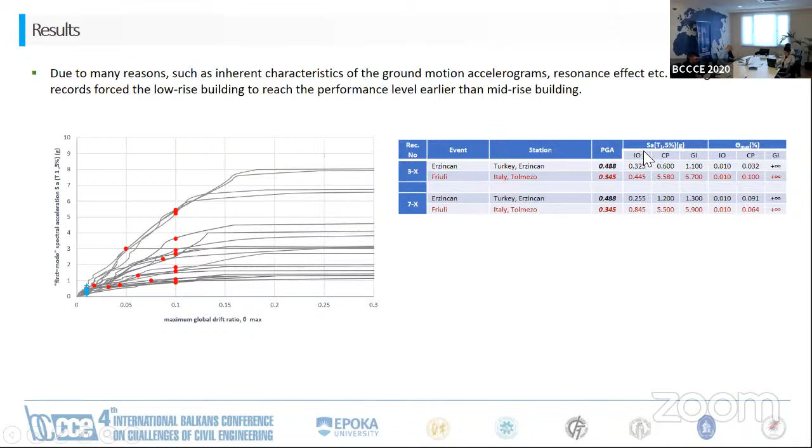What is important here is that from the incremental dynamic analysis, either from the graph or the tabulated values, we can read for any limit state or any record the peak ground acceleration that has reached that limit state. For example, if we want to know the maximum drift that happened to that building at 1G for 16% of the samples, we can immediately read from the graph and come to specific values representing that curve.

Also, the values are tabulated for both the fractiles and the incremental dynamic analysis curves. To summarize, two buildings were considered in our study. The mathematical model was utilized under the Zeus software environment. Since these analyses require many runs, above 1,200 nonlinear analyses were conducted to generate the incremental dynamic analysis curves and the fractiles. We used the guidelines of FEMA 356 under a suite of 20 ground motion records.

The methodology is very important, especially to generate the incremental dynamic analysis curves, so we prepared a specific algorithm to complete the methodology for our study. In the end, we summarized all the fractiles into 16, 50, and 84% according to previous studies, so immediate occupancy, collapse prevention, and global instability were defined for all the curves. Here is the list of records that pushed or forced the low-rise building to fail before the mid-rise building.

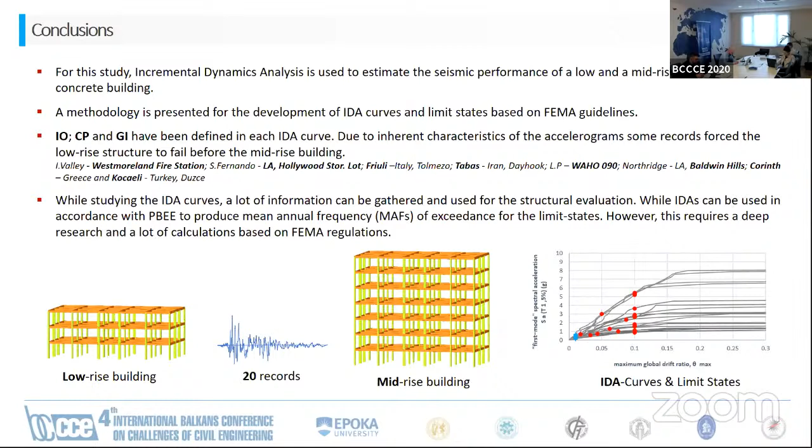From the fractiles we can read much information, and this is a very wide field for interpreting the results. However, this study could continue further to produce the mean annual frequency of exceedance for different limit states, though this would require more time and analysis to achieve our goals. So thank you very much. In case you have any questions, it will be a pleasure to answer them.

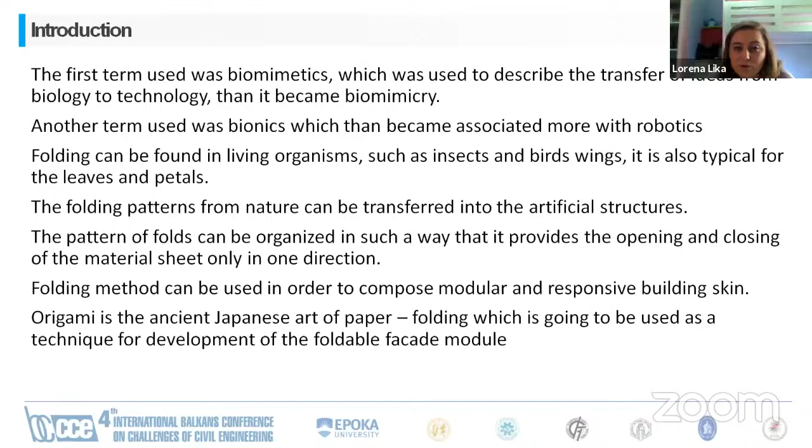The folding pattern from nature can be transferred into artificial structures. The pattern of folds can be organized so that it provides opening and closing of the material sheet only in one direction. Folding methods can be used to compose modular and responsive building skin. We used origami, the Japanese paper folding art, to develop a foldable facade module. Here are some examples of biokinetic facades, such as Al Bahar Towers, Kiefer Technic Showroom, Ocean Pavilion, and Hydroskin Pavilion.

The chosen object to implement this facade is the Mediterranean University of Tirana, since the whole facade is made of glass and the glare is very bad, and the louvers currently on this facade don't work well at all. The chosen form to translate is the bat wing, because of its flexibility and the three main conditions we want for this project: open, semi-open, and closed. It also has the most fluid and smooth movements.

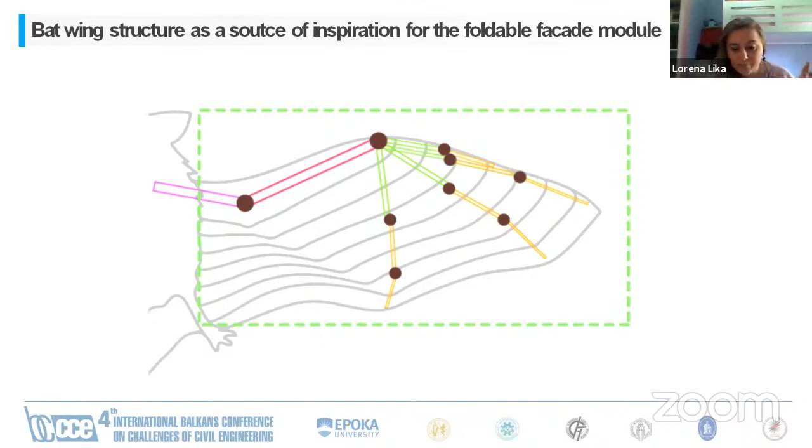These are the first models, starting with the simplest movement of the bat wing, and then going to the more complicated movements and structure of the bat wing.

These are the stages of development of the geometry of the facade module. First, we start with a rectangle piece of paper with dimensions and sides in 1:2 relation with each other.

Then the rectangle is divided in the middle, which creates two equal squares. These squares get divided once more by a diagonal, the green interrupted line, through each of them that passes through the upper middle point of the rectangle and intersects with the line we drew in the middle. The point where they join mimics the elbow joint of the bat wing.

We have 4 equal triangles and divide only 3 of them in the middle, with a line that starts from the angle where the other lines are intersecting to the middle of the length facing that angle. The left triangle is left untouched for now because it serves as part of the forelimb, which allows for the opening and closing of the bat wing.

The magenta lines, which have been constructed until now, make up the part of the bone structure of the bat wing. For the part of the membrane, another division is needed because of the flexibility of said membrane.

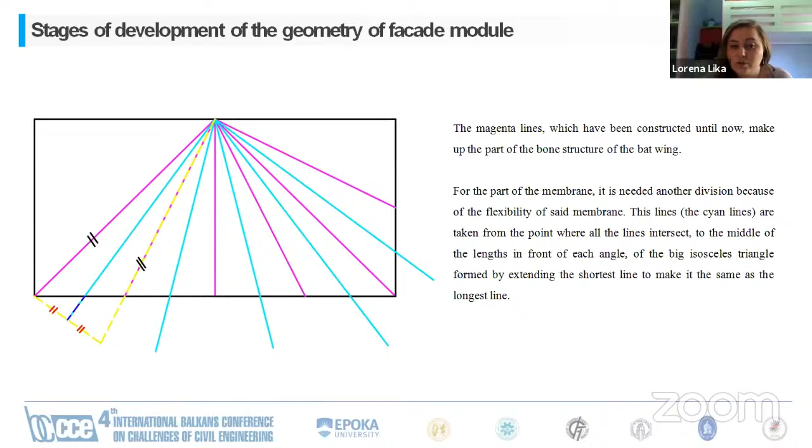To further deal with the flexibility of the membrane, there are needed these little triangles which will fold on themselves and give the dynamic movement to the module.

To build the triangles, first we have to find the middle point of the bigger triangles. This middle point is found by constructing a line from each angle to the length in front of the angles. The intersecting point, marked with a green circle, is connected to the edges of the bigger triangles.

So to find the valley, which is the line that is going to go down during folding, we need to find the right angle for the bigger triangles to fold in a symmetrical line.

To find this triangle, we take into consideration the small triangles formed at the base of the bigger triangles. We need to find the symmetrical line of the small triangle. From math, we know that the symmetrical line of an isosceles triangle is the line from the smallest angle of said triangle to the base, which forms a right angle.

So, to find the right angle, we elongate the smallest length of a small triangle and make it equal to the length in front.

Then we create another isosceles triangle, and easily find the right angle we need and find the symmetrical line. The point where the symmetry line of the small yellow triangle intersects with the base of the bigger triangle is the point we need to connect to the middle point we found before.

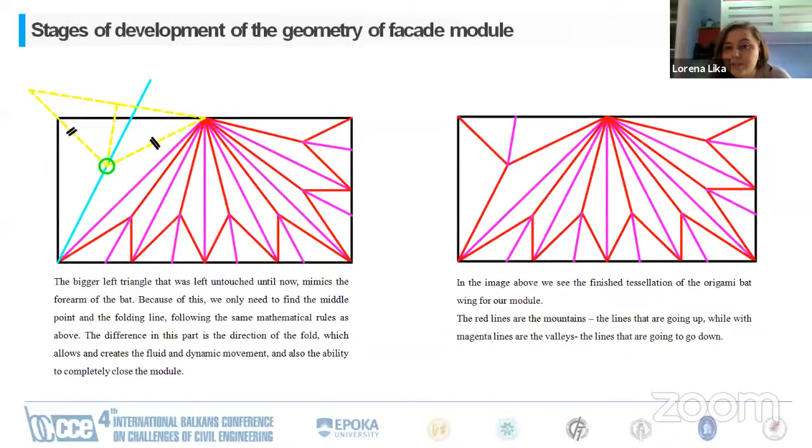For the simulation of the facade module, I have used Grasshopper, and here you can see 6 stages of opening of this module.

Also, I have used Ladybug, which is also a tool of Rhino, to get the data of how well this facade skin responds. I have the spring equinox, fall equinox, summer solstice, and winter solstice, which are the main differences in the year with heat, glare, and temperature.

I have also done a simulation with the opening of the facade in all 6 levels of opening, 6 conditions. So first we have the glass facade as it is, and the glare from that. Then we have 0% opening, 10% opening, 30% opening, 50%, 70%, and 90% of the facade implemented in the building. We can clearly see the difference.

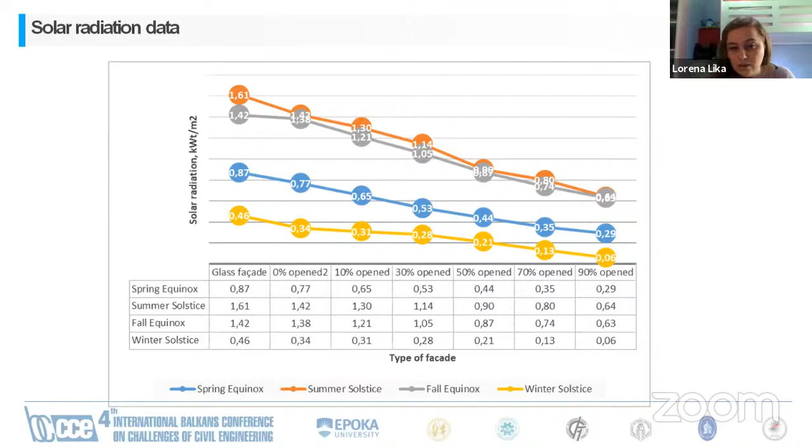So some conclusionary remarks. Biomimicry is the concept which makes possible the study of the chosen form and finding of the way and the idea of the mechanics for the project. The chosen form of nature to study was a bat wing because of its flexibility in movement and the way it can take different positions during flight.

The project module needed careful mathematical calculation to be built in a way that allows the parts of the module to be folded correctly with no extra edges. The finished product has to remain in position, open, semi-open, and closed, and other sub-positions or ways of opening in different degrees. The model is very flexible, and the opening is done by a light and heat sensor attached to it to make the facade react to the environment.

Thank you. I also have a little video to show. This is the simulation of a facade.

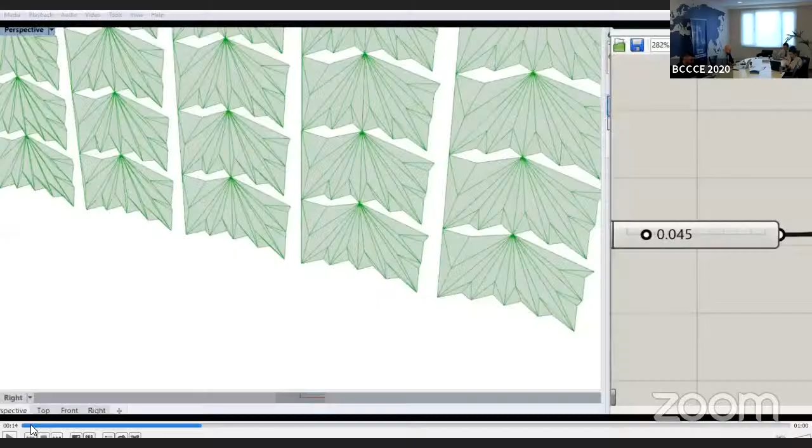We cannot see it. You cannot see it? So stop sharing and then share again your video or your screen. Just a minute, please. Let me help you. Share it again. Yes. Is it okay now? Yes. Okay.

So this is the simulation done with Grasshopper.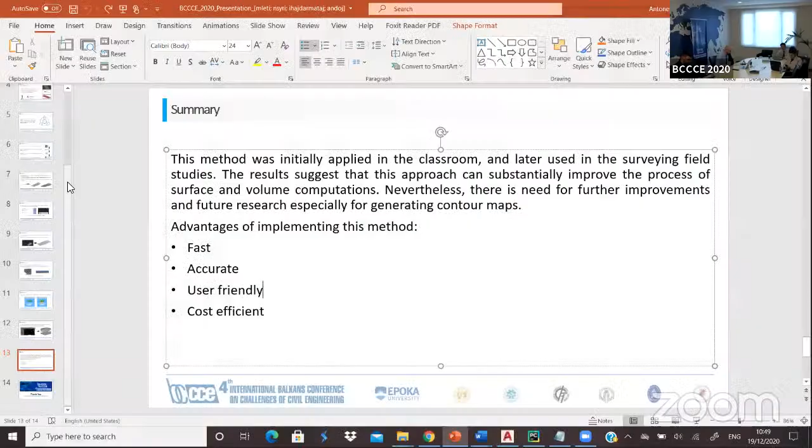Can you see it? Okay. So this is our project, an innovative and practical solution for the surface and volume computation in land surveying. Our team involves Nertila Suri, Ileriana Haidar-Martai, Antonela Ndoj, civil engineering students, and Professor Marcel Leti at Epoka University.

The volume calculation has always been an important task in land surveying. Many researchers have been working for many years to find the most relevant and appropriate method in order to increase the precision of the volume calculation and data computation using various mathematical methods.

There are three main points: site measurements, office works, and then the result and the product. The process of our work, which most civil engineers may know, is a manual one. We are familiar with it.

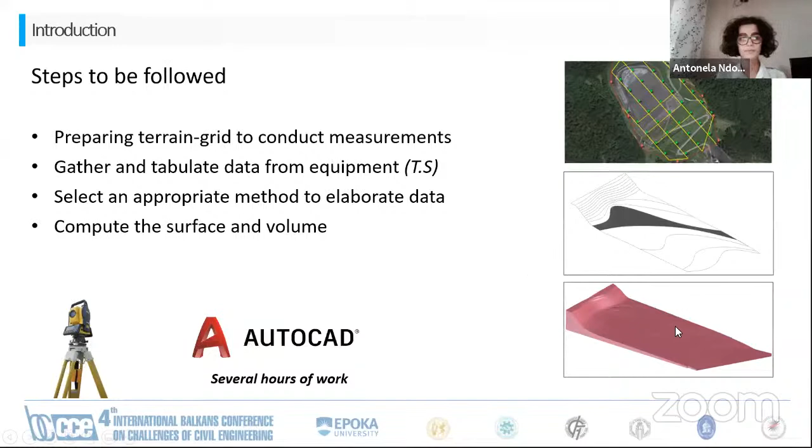As civil engineers, we would like our calculations to be precise, also reduce the cost, and consume less time conducting an analysis. Regarding these three critical points, we believe we have found an alternative solution. This study aims to present a practical, efficient, yet innovative automated solution of volume calculation with high precision, always by using an algorithm in AutoCAD scripting.

I'm going to explain step by step the process we have followed. Firstly, all the gathered data from the total station will be tabulated in an Excel spreadsheet. Since Python is a high-level programming language and offers a variety of libraries, one of which will allow us to upload the Excel file with all this data and record all that is needed to continue the code.

This algorithm aims to prepare a notepad file with AutoCAD command lines. Lastly, a file will be imported and executed in the AutoCAD software. AutoCAD allows us to do this.

The algorithm uses the environment of AutoCAD software to compute the volume and the surface of the terrain. It utilizes a superspline method for interpolation of the 3D data points gathered from the land measurements. The output of this method are the AutoCAD drawings, including the 3D surface here and the 3D volume later.

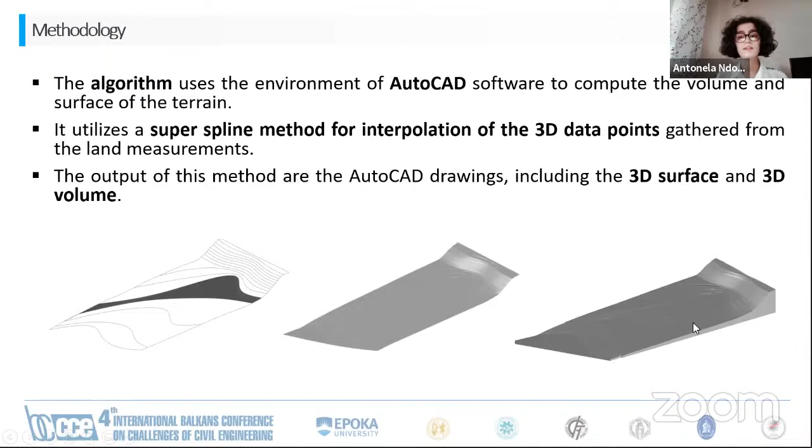AutoCAD is capable of executing multiple command lines automatically according to its scripting language. For example, we have a basic example of building two different lines in AutoCAD using this scripting language. We have two lines with separate coordinates, and then we drag and drop the file into the AutoCAD working space, and it will show two lines formed.

The data tabulated in an Excel spreadsheet is analyzed and checked for possible errors using Python 3.7. In the AutoCAD working space, lines and splines will be formed, and then small surfaces will be constructed for each, to be united at last into one surface. Data points are prepared accordingly to be recognized by the AutoCAD scripting.

The 3D surface will serve as the last step to draw our volume. The lowest and highest z coordinates of the surface will be considered as boundaries for the volume calculation. By using the slice command, we will have cut and fill volumes, as in this case.

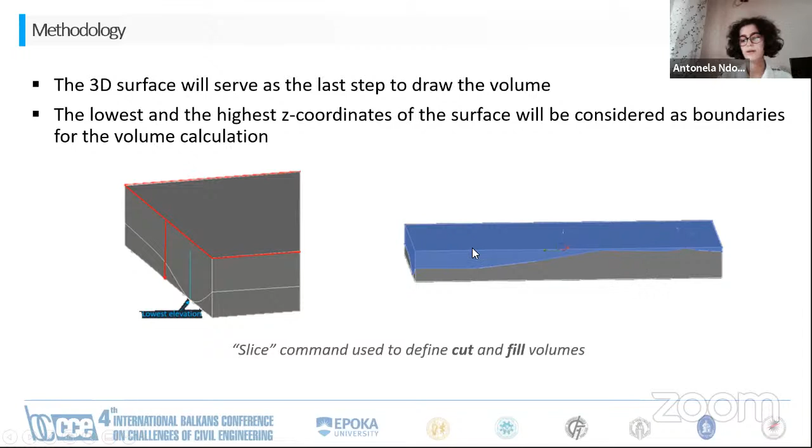Then we have a user interface window, also prepared in Python. We will import the Excel file we have in our computer with the data from the total station. It is also important to enter the number of horizontal grid lines. After completing these two, the algorithm is ready, and we only have to run it.

The application will automatically generate a file saved as .scr. This is in order to save the notepad file into an AutoCAD scripting file, so that AutoCAD can recognize it. It requires simply a drag and drop, and of course it will save several hours of office work.

This method was initially applied in classroom, later used in surveying field studies. The results suggest that this approach can improve the process of surface and volume computation. Of course, further improvements and future research are needed, especially for generating contour maps.

Advantages of implementing this method include being fast, accurate, user-friendly, and cost-efficient. Instead of doing the same design repetitively, civil engineers must start to use these scripting files because it will ease their work, and as I mentioned before, it is less time consuming.

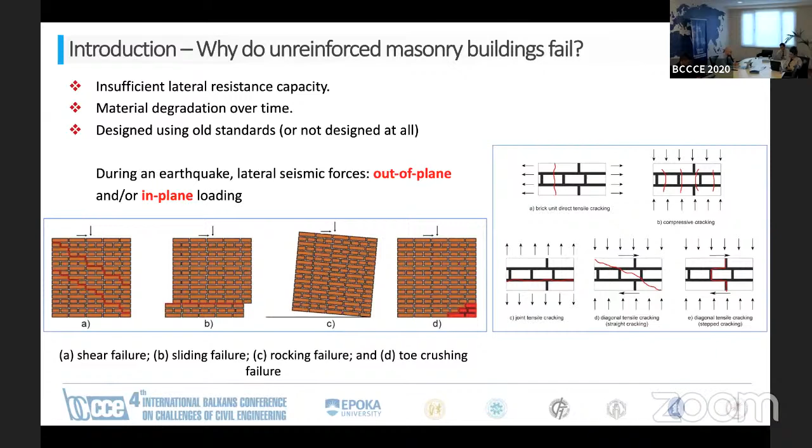If we can limit out-of-plane failure by adding various strengthening techniques like tying or using external additional steel rings or other elements. Regarding in-plane loading, there is nothing we can add externally, but we need to strengthen the overall properties of the masonry. For this reason, we need to find ways to improve this capacity in in-plane loadings.

The experimental campaign we did involved conducting a set of diagonal compression tests per ASTM E519, the American standard for diagonal compression testing. This technique can, let's say, imitate what an earthquake causes to the wall, but using static loading. We used three plain or unreinforced masonry walls made of 1.2 by 1.2 meters with 0.25 meter thickness.

And we also used three unreinforced masonry walls, then reinforced with polypropylene mortar coating.

The diagonal compression test is done as shown in the figure to the right, where we have a hydraulic jack exerting pressure. We have the loading shoe on both edges of the main diagonal where it is compressed, and we have dial gauges that measure deformation on both sides of the wall.

The wall has been constructed using two-leaf English bond with clay bricks, and the mortar joint is 15 millimeters thick. These walls have been built by an experienced mason so that we can have a similar construction typology to unreinforced masonry buildings found in Albania or elsewhere. The volumetric mix ratio of cement, lime, and sand is 1:6.

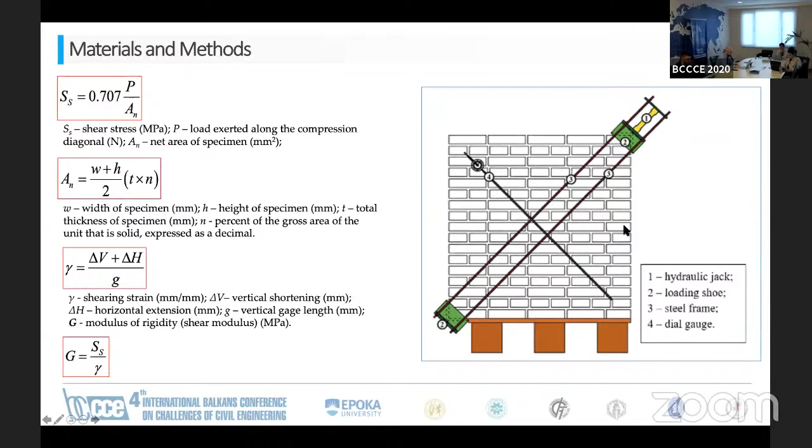Afterwards, the mortar is prepared and applied. One layer is applied first in order to improve adhesion, and then we add the second layer. The overall strengthening plastering layer is about 25 millimeters thick.

The composition of the mortar is a mix of just cement and sand. We started with a ratio of 1:1. We also tested a ratio of 1:4, meaning 1 portion of cement and 4 portions of sand. The polypropylene fiber amount is around 2% by volume.

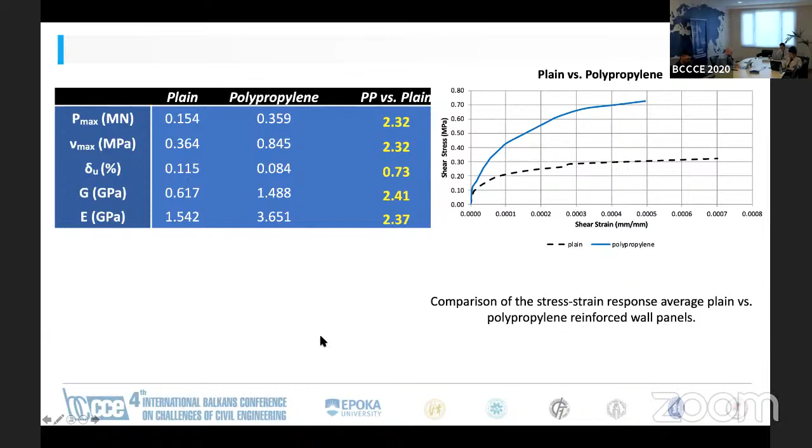Regarding ductility, this is an interesting topic and interesting case, because we added a very stiff mortar with a ratio of 1:1, the wall didn't have large ductility, let's say. So it had less than the unreinforced panel. However, if we compare the shear strength, it is considerably high. For this reason, in the future tests, we had to change the mixture and the composition not to be 1:1, but 1:4.

We also did a finite element modeling using Diana software, using a simplified modeling method with brick crack interface, where we had to model bricks, brick joints, and brick crack interfaces using some elements that the program already possesses. So we had these elements, Q8 MEM and CL12I interface element.

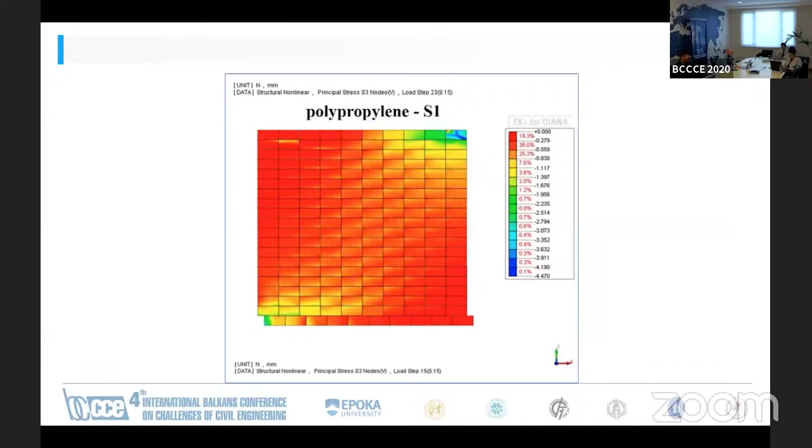This is how we modeled the panel. So we had to consider the brick, the joint, and the cracked interface, as well as we ran the analysis. And we somehow tried to simulate what actually happened in the test results. You could see here the distribution of the stresses along the compressed diagonal.

We also tried to calculate the stress-strain, shear stress and shear strain for both cases, for the experimental result and for the numerical result. As you can see, it is a pretty good fit, but with the numerical results being a little bit more ductile than the actual ones.

So to conclude, we did 6 diagonal compression tests, 3 on plain and 3 on polypropylene reinforced panels. The main aim was to observe the structural behavior of masonry and investigate the performance of the reinforced panel. Polypropylene reinforced mortar plastering technique showed on average an improvement of ultimate strength and the modulus of rigidity. However, it demonstrated a less ductile behavior with a deformation capacity of 70% of what the unreinforced panel had.

Also, the model that we developed showed a pretty good correlation with the experimental result, which we believe means that polypropylene reinforced mortar coating can be used, can be a good technique to strengthen the wall, provided that we do not need to have an increased ductility of the unreinforced masonry.

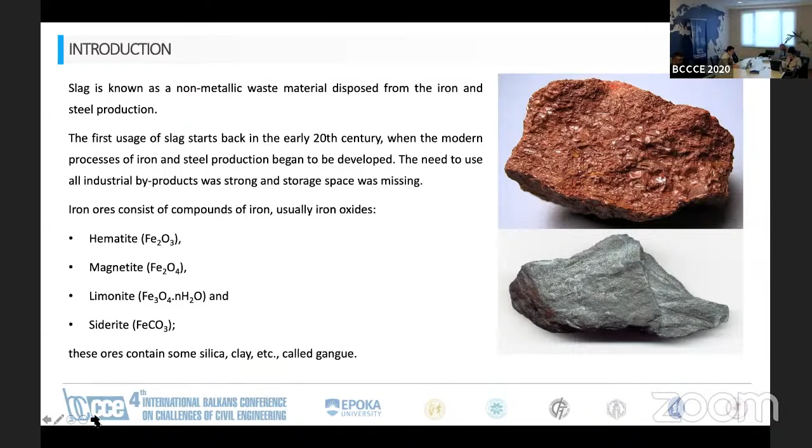As iron is heavier, it comes down to the lower part, whereas slag is lighter and stands in the upper part of this molten mass, and it is obtained from the upper part. These slags are the byproducts. We do not produce slag purposely, but it comes out as a waste material from the production of iron.

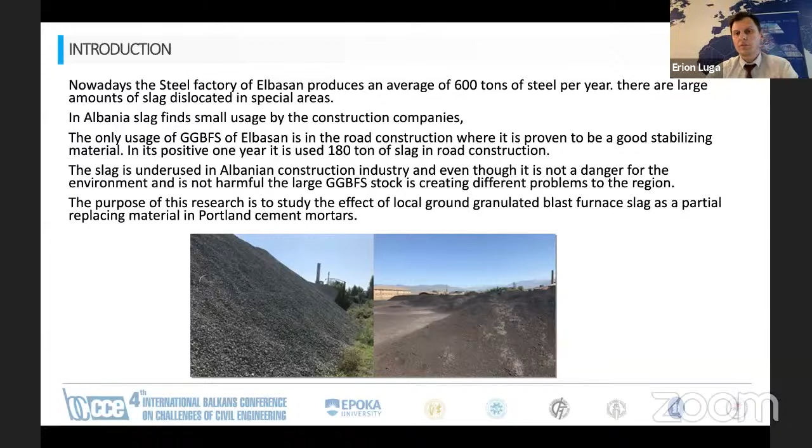So slag is still underused in Albania. The slag is underused in the Albanian construction industry, and even though it is not a danger for the environment and it's not harmful, the large stock of ground granulated blast furnace slag is creating different problems for the region. The purpose of this research is to study the effect of local ground granulated blast furnace slag as a partially replacing material in Portland cement mortars.

In this study, different aspects of the use of ground granulated blast furnace slag as a Portland cement replacing material were investigated through laboratory experiments, consisting of evaluating its effect on normal consistency, initial and final setting time, as well as flexural and compressive strength.

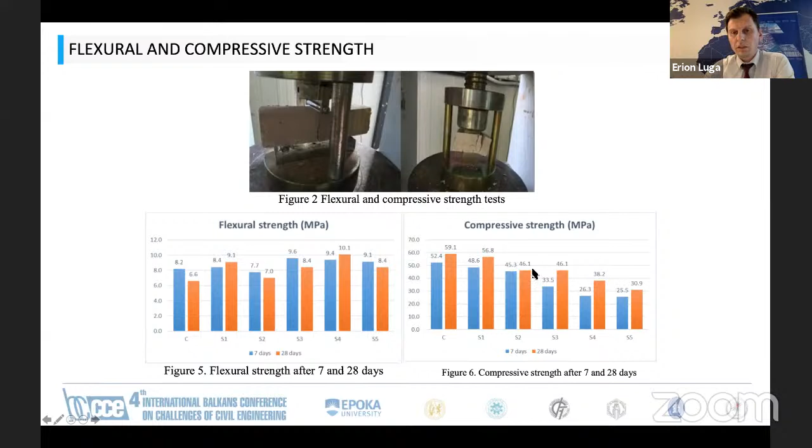Coming to the compressive strength, the trend decreases as the amount of slag increases. Now we have to analyze this part—why is there such a decrease while increasing the amount of slag?

From the results and the chemical composition, we can see there is a very high amount of iron oxide in the composition of the slag. So in order to analyze the results, we must take into consideration the chemical composition of the slag, which resulted in a high percentage of iron oxide. The high content of iron oxide decreases the percentage of calcium oxide and silicon oxide, which are very important for the binding and pozzolanic properties of these mineral admixtures. This results in a decrease in the cementitious and pozzolanic properties of the slag.

To come to the conclusions of this investigation, it was concluded that this ground-granulated blast furnace slag deposited in the metallurgical factory of Elbasan, Albania, is not very appropriate for use as a mineral admixture because of its high amount of iron oxide. This also shows that a high amount of iron was lost during the production of steel, so this oxide should be part of the production, not wasted. By better treatment of the raw materials, higher amounts of pure iron or steel could be produced, and at the same time, the generated slag would have better properties and be more usable.